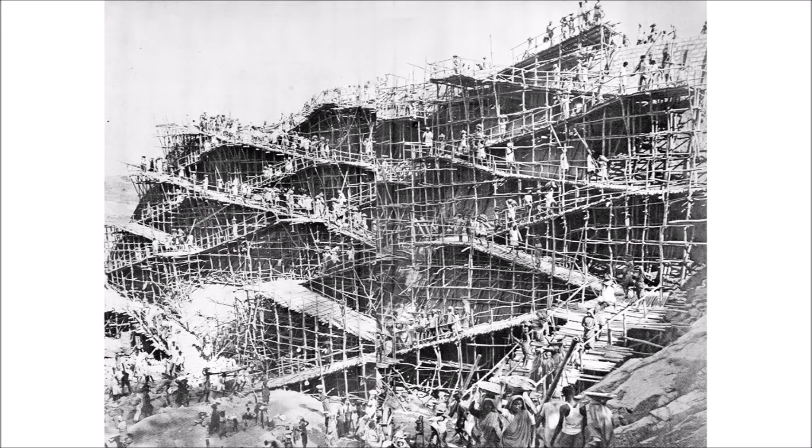Drawing from the research on 3D printed shelters and parametric wood assemblies, the design of the nested house is developed. Bamboo as a construction material is quite versatile. The project draws on the use of bamboo as a scaffolding material as well as for structural formwork.

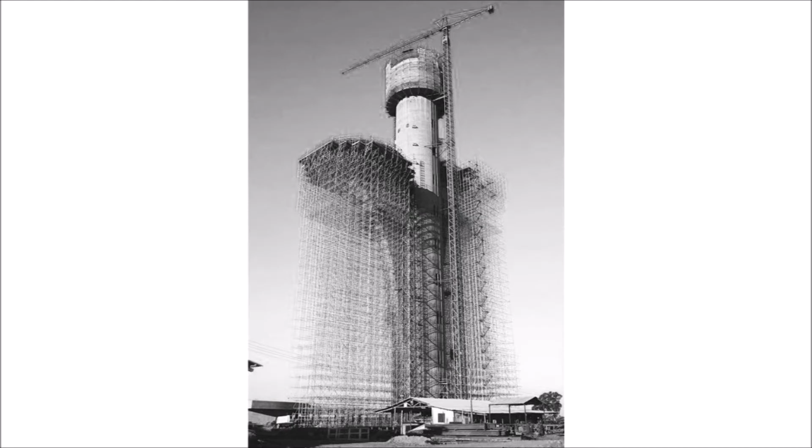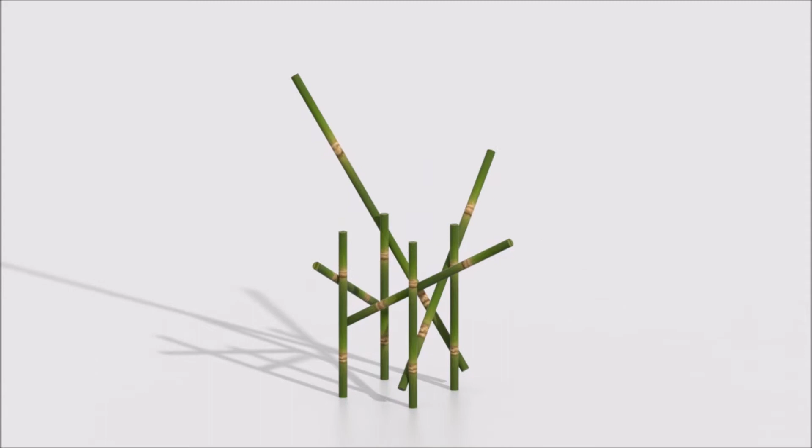The idea of using this banal scaffolding method into a more functional and permanent structure is explored using parametric design of the bamboo unit. Four vertical bamboo legs and four diagonal braces make up one unit. Cylindrical plastic cut from recycled bottles are inserted between two units and heated in place, joining them together.

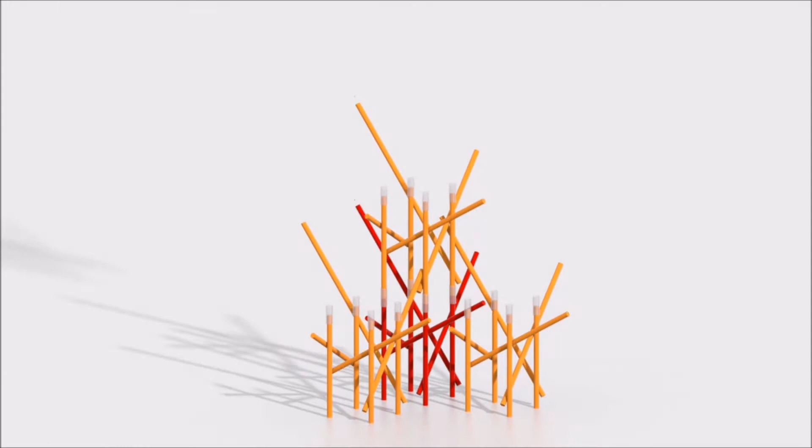The units can grow in X, Y, and Z axis. The diagonal braces get attached to the adjacent units, further stabilizing the units through triangulation. A 1:1 scale prototype of the unit was fabricated using 2x2 wood members. The different pieces of wood are held together using heated plastic technique.

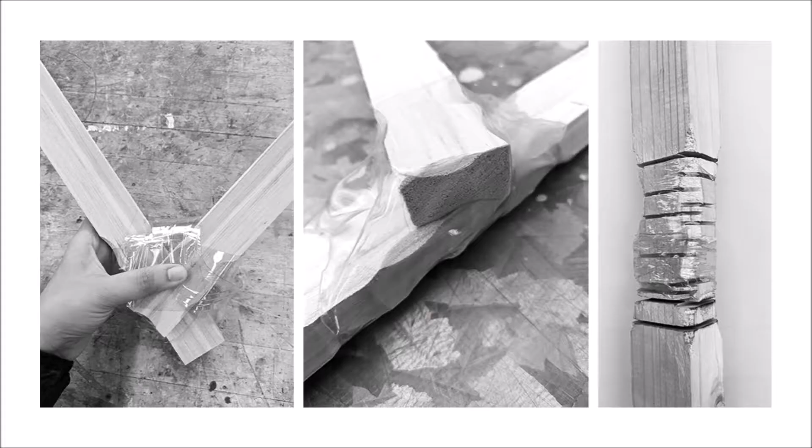Here, the plastic bottles are cut and wrapped around the wood ends, then heated using a hot air gun. On heating, the plastic shrinks and wraps tightly onto the wood, making the joints extremely strong. With this system of fabrication in place, the bamboo unit starts to grow and evolve.

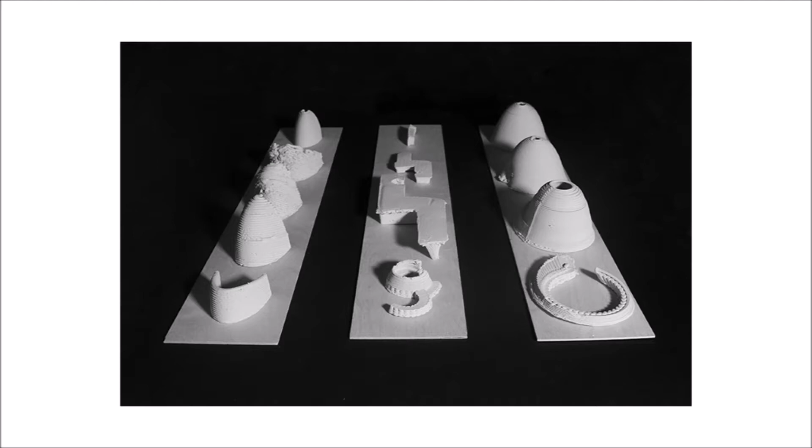Through parametric modeling, spaces are booleaned out of the bamboo mass to visualize the volumes and gradients. Continuing on the studio's research on 3D printed enclosures, various G-codes are generated for the print of vaults and domes, with the idea of incorporating arched and circular openings within the print.

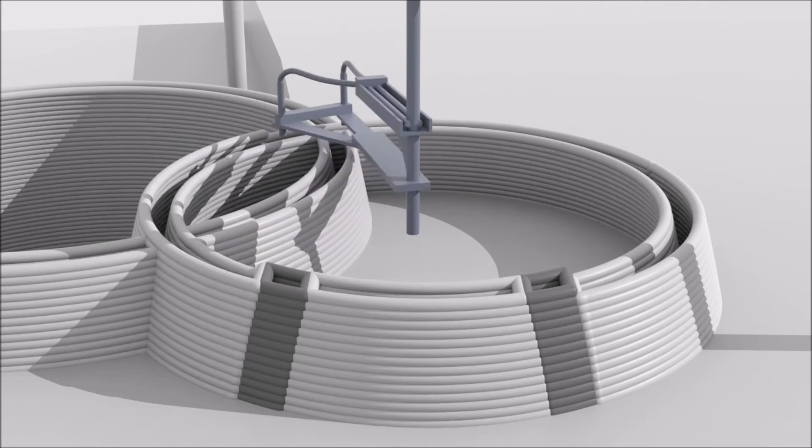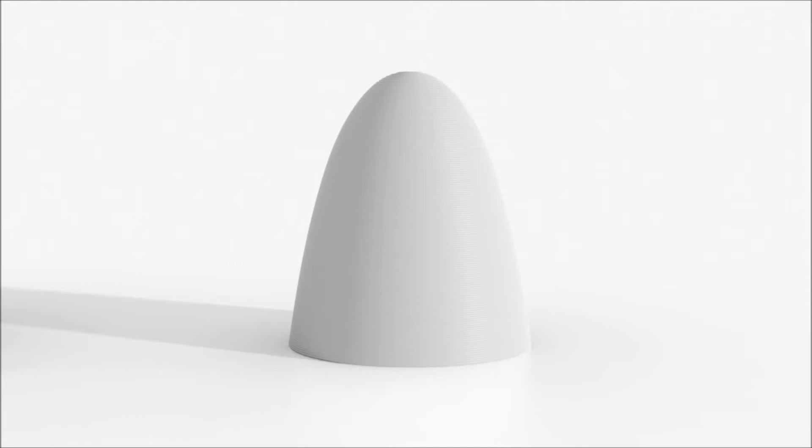Further, a multi-material printer is developed to simultaneously print adobe for wall and concrete for structural support of wall openings. A dome is a pure form of enclosure. It is also quite rigid. Using simple planes, the dome is sliced and slid around. This action of sliding the form to expose the space makes way for unique opportunities for design.

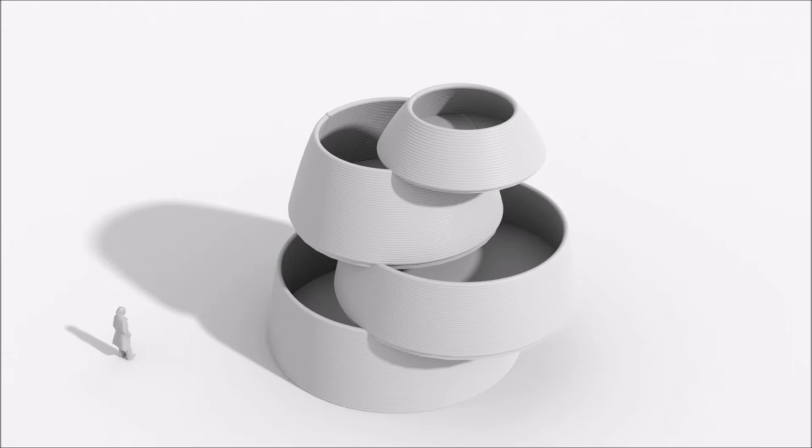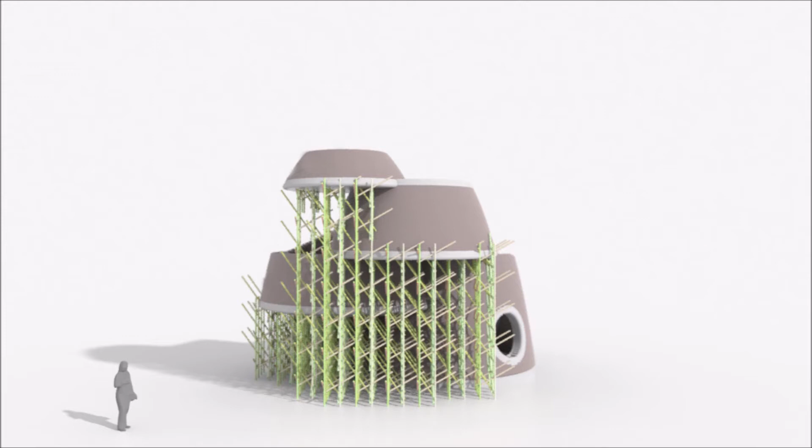The bamboo scaffolding is used as a permanent structural support system, allowing for the stepped adobe print. The sheer density of these bamboo units act as a waterproofing system, protecting the adobe while generating beautiful gradients of density and light.

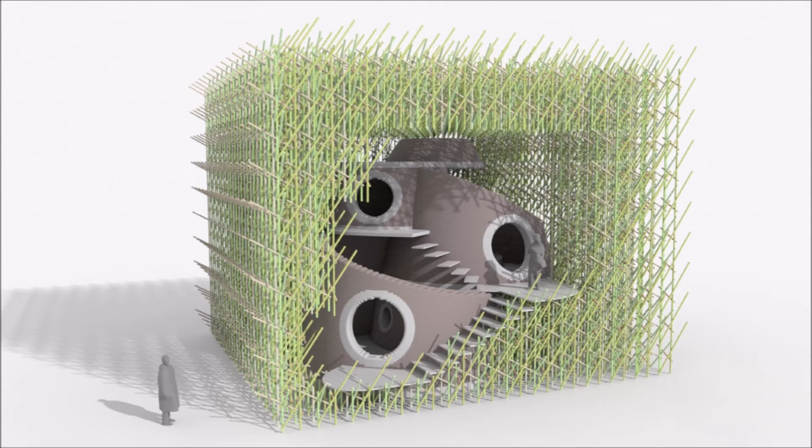The scaffolding system makes the sliding happen, and this sliding allows for interesting spaces beneath, beside, and above, based on the densities and relationship between the mud and bamboo. The house has three primary functions: gathering, sleeping, and bathing. With multiple openings, each space is visually and formally connected to the bamboo units and forest outside.

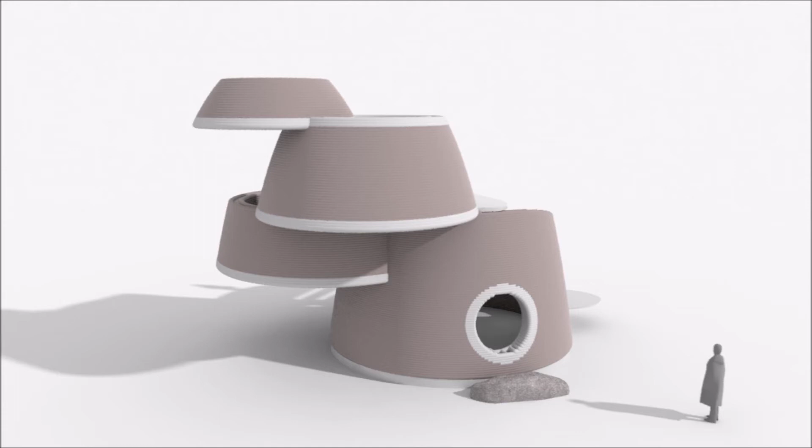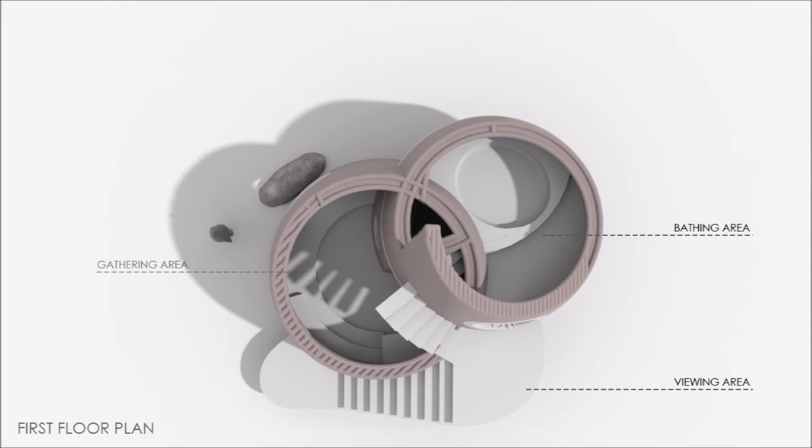The entrance is marked by a single opening. One needs to step on the rock and slightly bow before entering the house. At the ground floor level is the gathering and cooking area. A common fireplace provides warmth. Climbing the flight of stairs leads to the first floor with the bathing area. Further up and nested is the sleeping area at the third floor level.

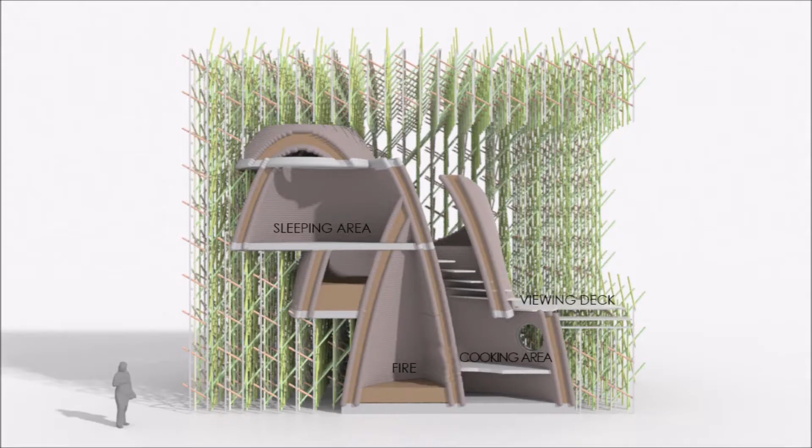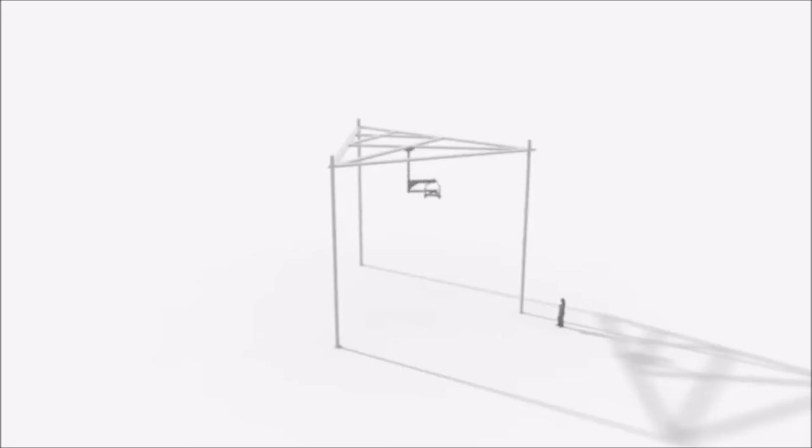Cutting a section through the building shows the various components at play. The fireplace warms all three spaces in the house. These walls run through all floors, acting as load-bearing walls. The first step is the positioning of the multi-material printer on site. The printer prints the plinth and steps.

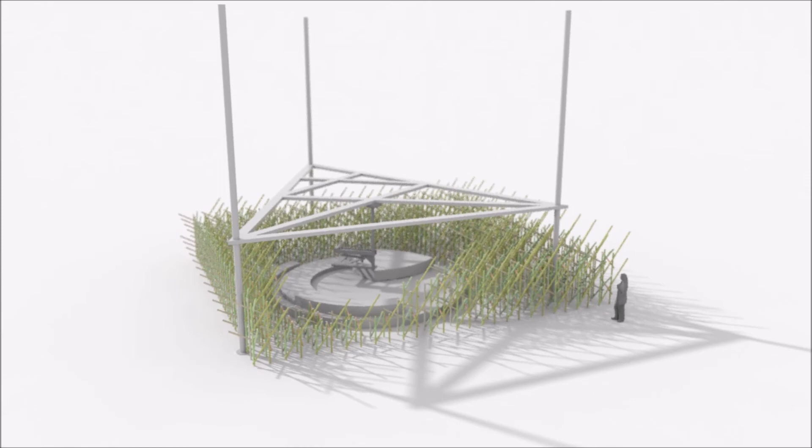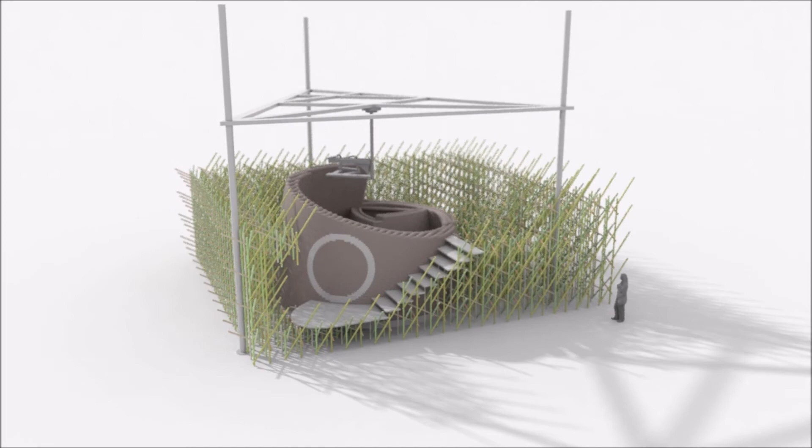The bamboo units begin to grow incrementally along with the print. The walls are packed with hay and sawdust for insulation. Wooden planks are inserted between layers of print, additionally supported by the bamboo unit. Once printed, the adobe from the opening is removed and recycled, while the printed concrete frame distributes the load.

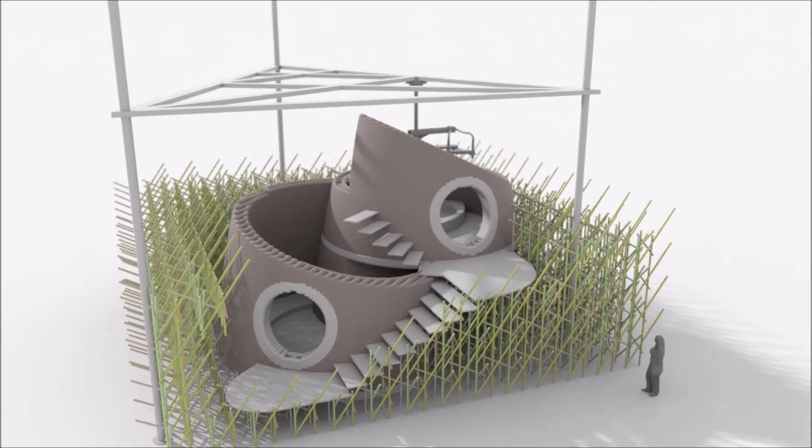The growing bamboo unit now acts as a structural scaffolding, holding the formwork in place for printing the concrete slab and adobe walls. The steps are cantilevered using the weight of the adobe from two walls. The same principle is repeated for the incremental growth of the printed house. Once the print is completed, the printer support system is removed and the bamboo structure is completed.